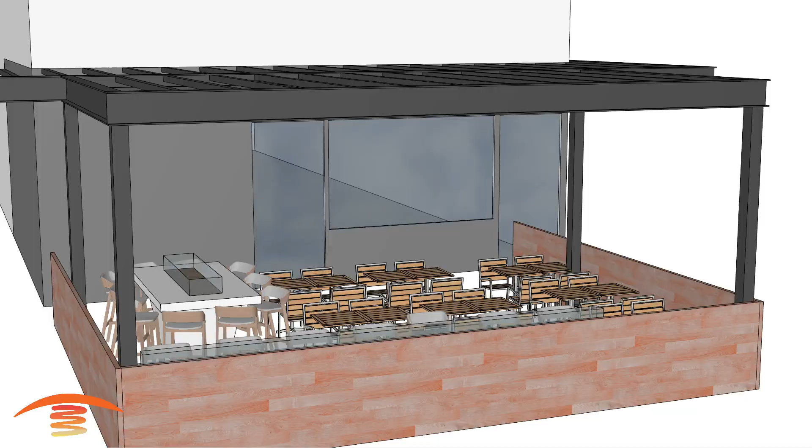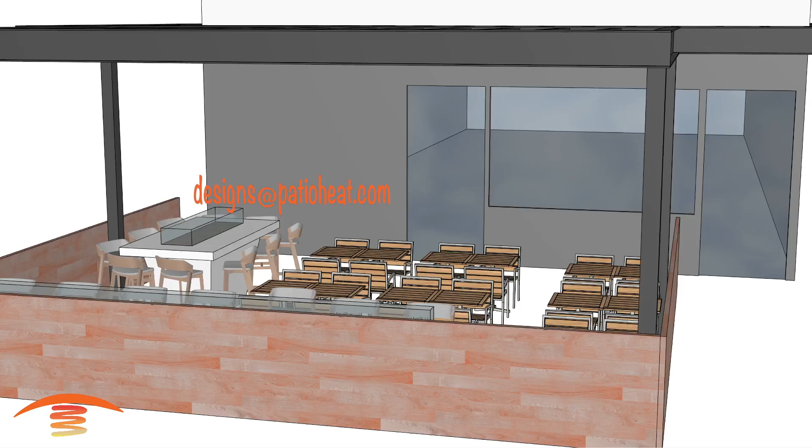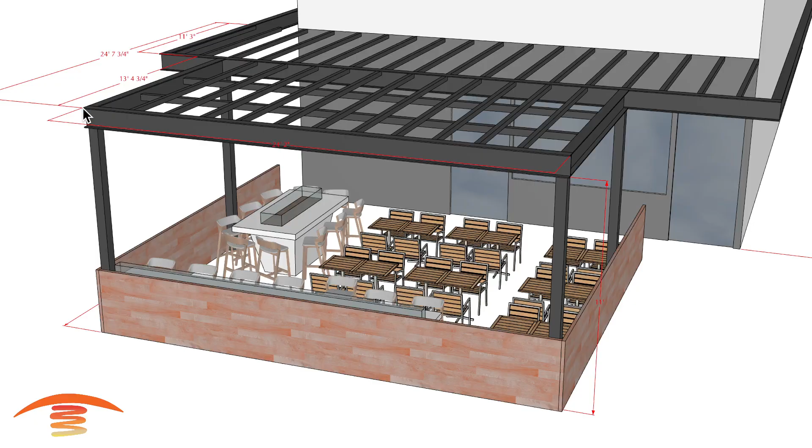So this is a commercial restaurant application, let's look at the overall dimensions I have here. Overall, I have about 24 feet from the outside edge to the outside edge, and a total basic seating position here at 20 foot 7 inches, maybe 20 foot 6. I got the floor plan for this application and marked up this particular space, and came up with about 24 foot and a quarter of a foot.

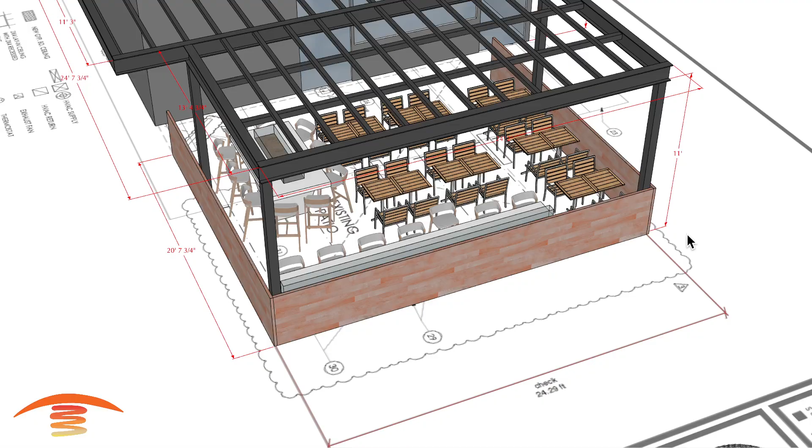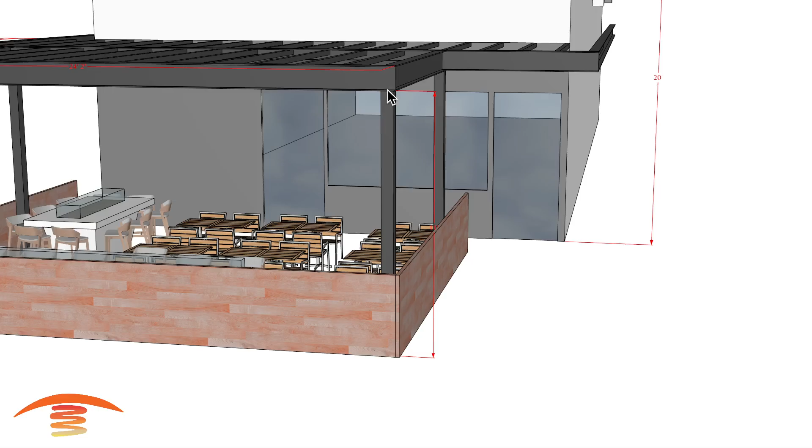Let's look at some of the other dimensions I have here. This overall section is 24 foot 7, and I also have a height of about 11 feet off the finished floor. Now this could be 12 foot. This section, the beam, is actually 12 inches, it could be lower, so I'm not 100% certain of that, but this is my best guesstimation.

We have bar stool seating over here, bar stool seating here, and then dining space over here. Let's turn off those dimensions and look at a couple of different options.

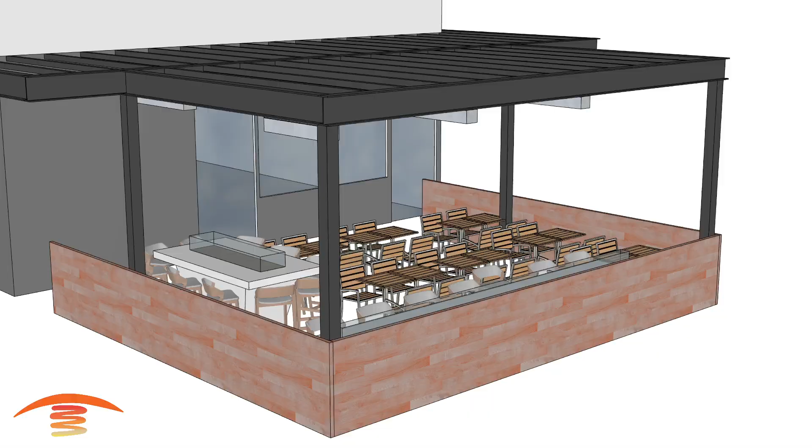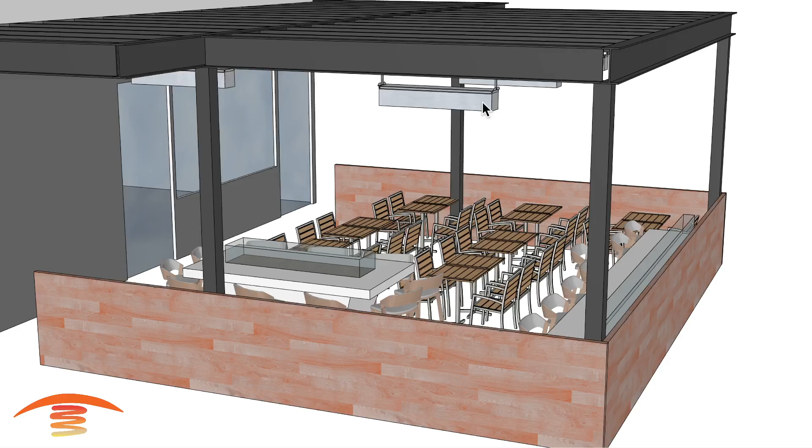The first option I like best would be utilizing the Sunpak TSH and S34 combination. So these two units here and this unit in front would be a TSH. That gives you the flexibility for bar stool seating height to turn the units high and low, in other words 34,000 BTU output or 25,000 BTU output, and based on the location, December is their coldest month of the year.

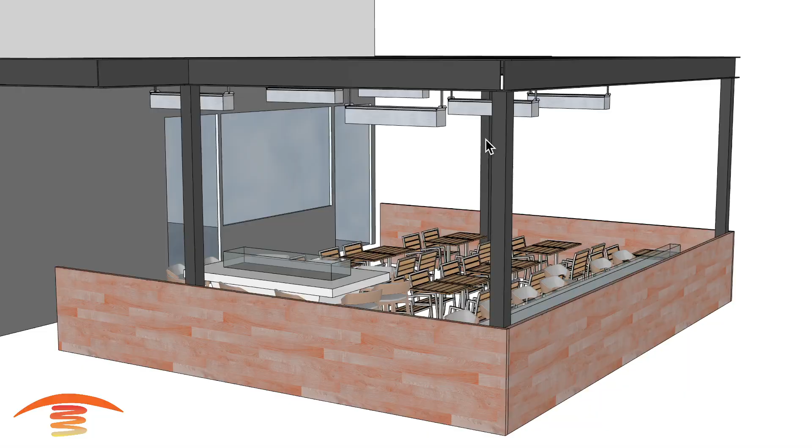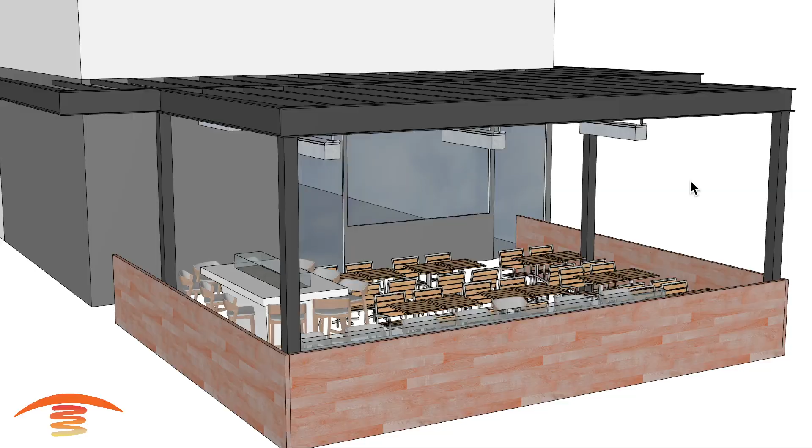I also looked at wind. The wind is pushing around 14 miles an hour at the windiest time of the year. These are gas burning units, so anything above 12 miles per hour on wind is something you want to be concerned about. You wouldn't want to leave the units on beyond that 12-mile maximum wind speed. In any case, the TSHs allow for that flexibility, especially for these positions for high-low.

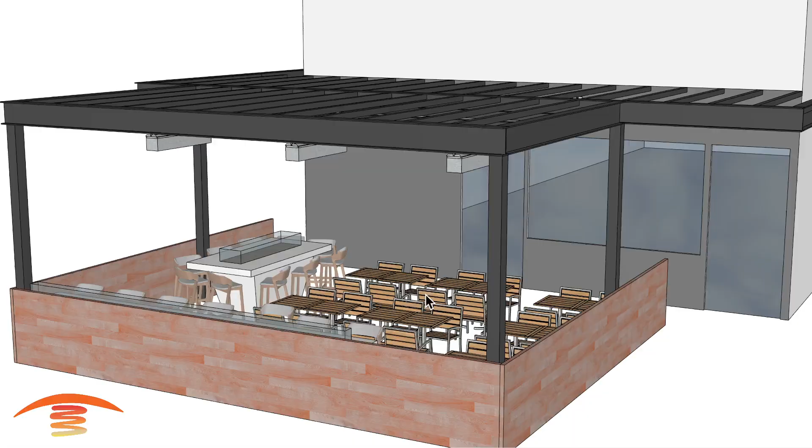Personally, I would probably go with TSHs on all the units, which gives you flexibility throughout the entire season, where maybe these particular customers would like just a low output at different times of the year, when it's in the 60s, 65 degrees, maybe they only want 25,000 BTUs. So that gives you a lot of flexibility using the TSHs.

Another thing is the maximum height I like of this particular unit is between that 8 and 10 foot max height, so this would be the bottom edge maximum of 10 foot off the finished floor, and I would prefer somewhere in that 8 to 9 if that's possible.

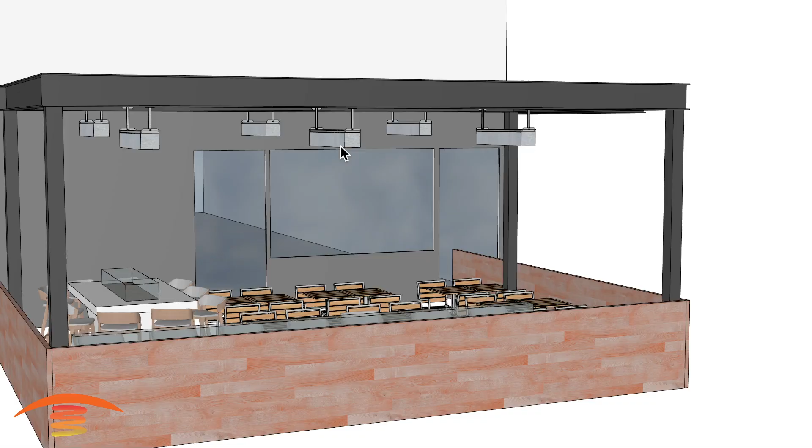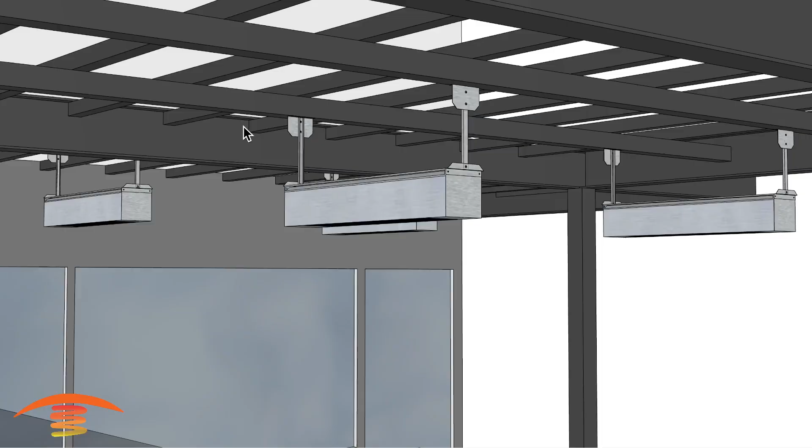When you mount the heaters, the bracket itself, or the bar here, comes in a 21-inch long bracket, so you can have them mounted on these cross members here, as well as these cross members over here. These are a little bit higher than these, so if you wanted to make sure they're the same height, maybe you can drop these down, but right now I have these at 17 inches drop down from the actual bar. The 17 inches is based on the fact that there's a clearance requirement.

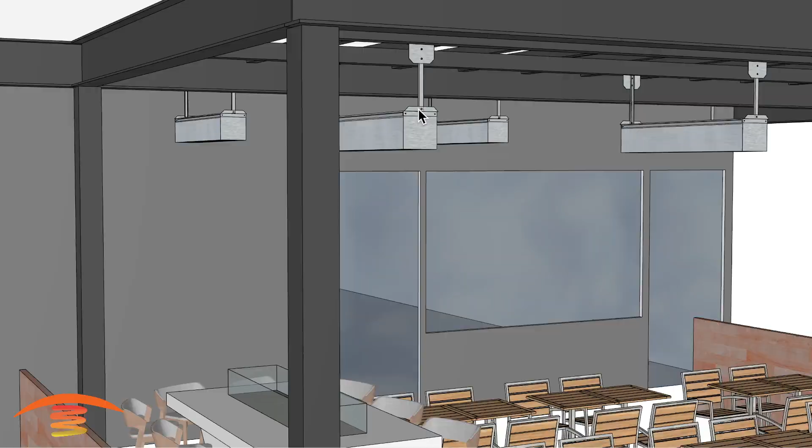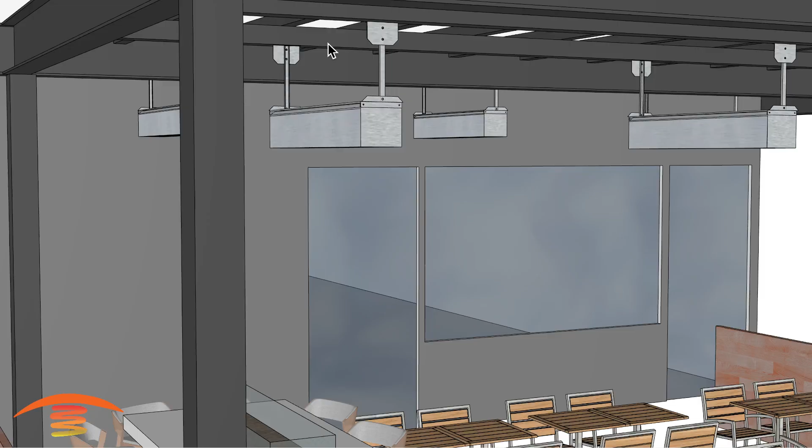Excuse me, that's 14 inches, a 14-inch clearance above the heater itself, and that's for combustible material. Now let's just say that this is all non-combustible, which I believe it might be, because it looks like it's all steel frame, but I'm not sure if there's any cover on top of it.

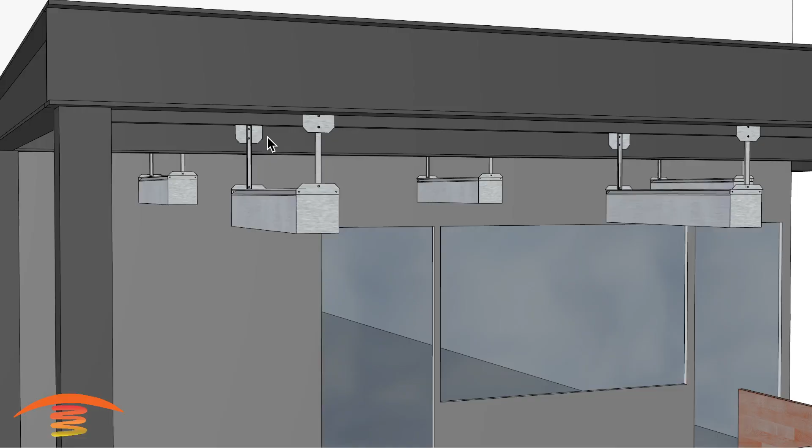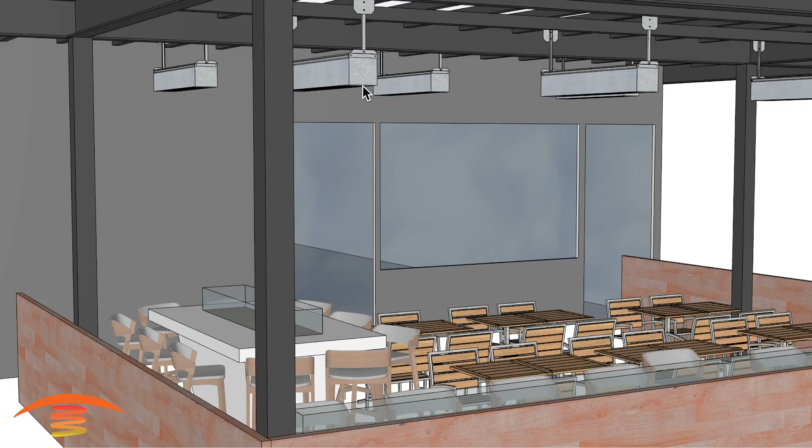So that's something else you have to be concerned about. You would have to keep that 14-inch clearance from any distance that's up here, let's say, so from here down to the top of the heater is that 14-inch minimum for any combustible material. However, if it's non-combustible, you can go a little bit higher, but again, putting the unit higher than that 10-foot mounting height at the bottom of the unit is something I'm concerned about. I would prefer it to be, like I said, between that 8 and 9 if possible, and 10 at the maximum for the bottom edge of the heater.

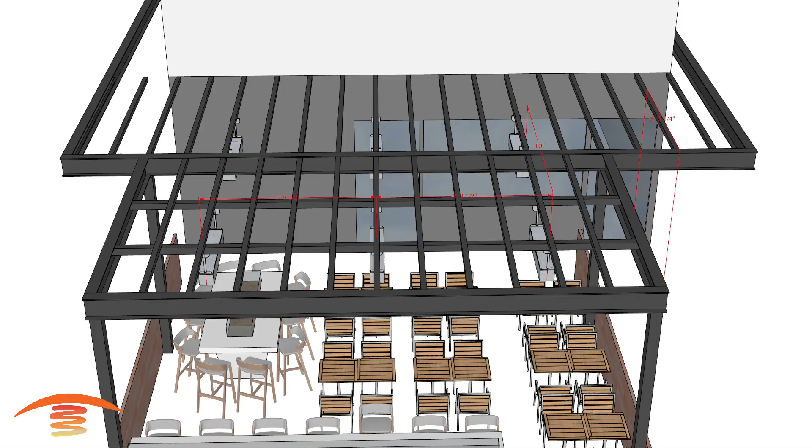In any case, I did place these heaters, trying to center point them based on where it looked like these cross members go. Let's look at those distances I have. Right now I have 7 foot 9 inches from center point to center point, and that would be true on this. I tried to base it on the center point of the patio itself from here to here, and I did have to move them based on where this actual cross member is.

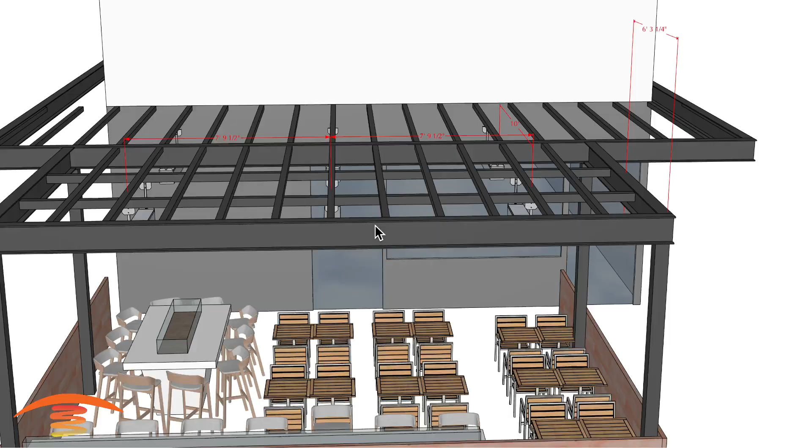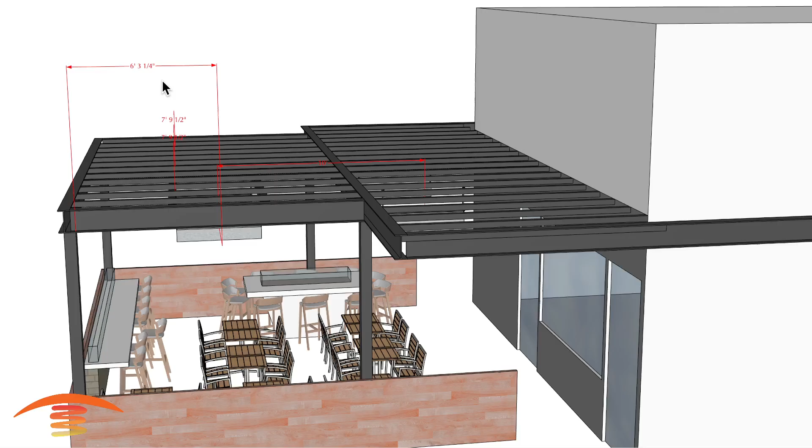So it's not exactly in the center, but that's the focus point of the positions of the units themselves. You can see the center point of the heater here to the center point of the heater here at 10 foot center to center. And I have the center point of these first ones from the inside edge of this post here at 6'3", and that should be all of what you're looking for.

Another thing to mention is the dimension of the heater itself. This particular part is 8 inches wide, 8 inches tall, and 48 inches long. So keep that in mind.

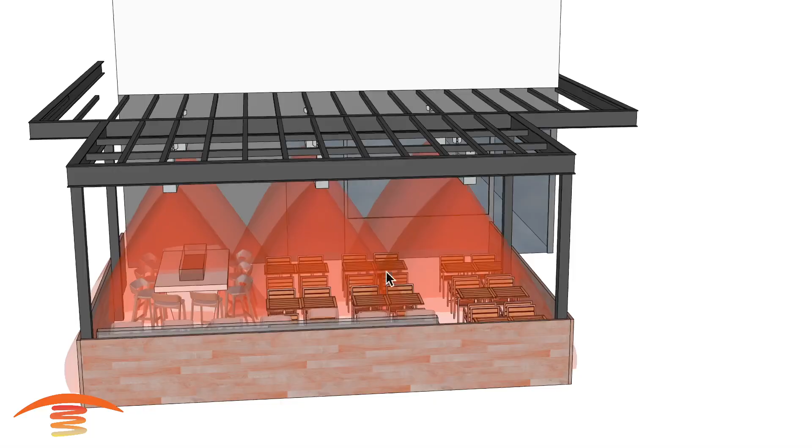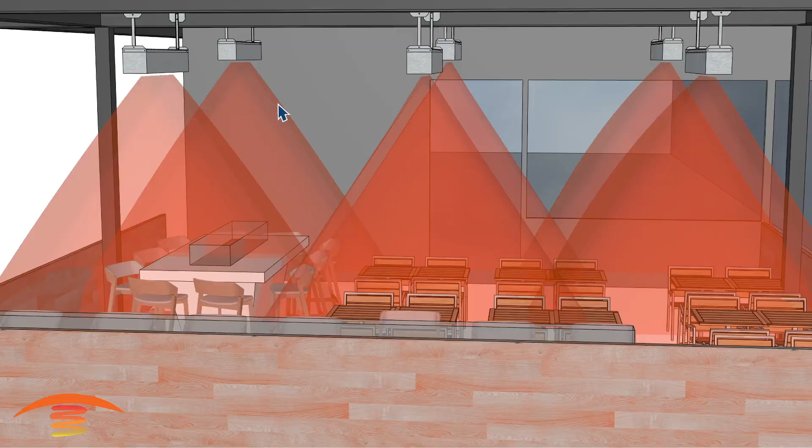Let's look at the footprint of heat. The footprint of heat is heating up this whole entire patio just perfectly. This is why I prefer this particular quantity, 6 of the units, and the positions that I like, because you're going to heat up all the space. There might be times where this particular customer doesn't want any heat, but other customers want more heat. So this allows you to be very flexible with this particular application.

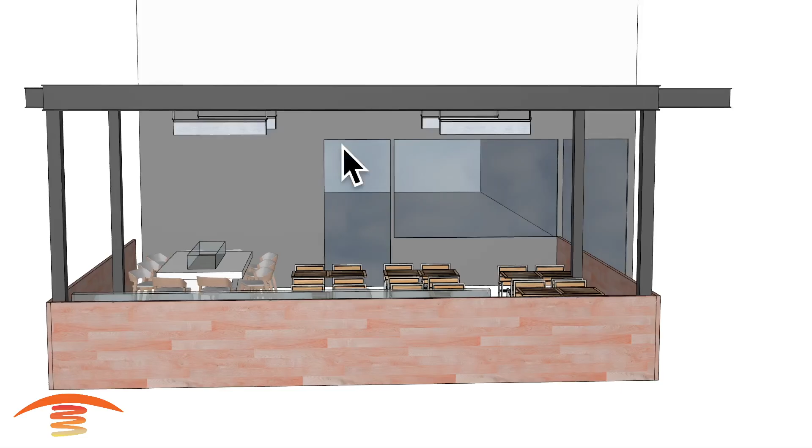So that is option 1, and let's go ahead and look at option 2. That would be possibly using 4 units. These are the same units, TSH, TSH, and TSH, and this one here, S34 or TSH as well.

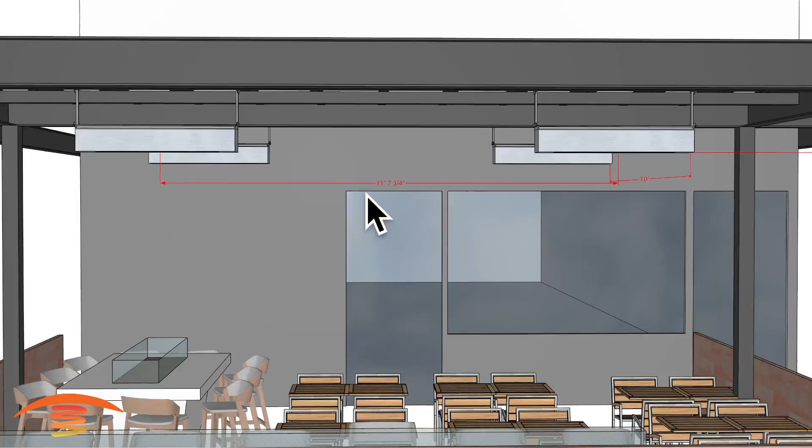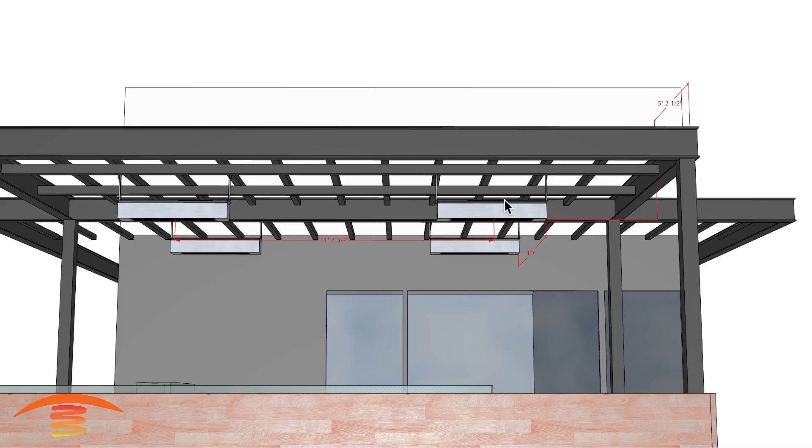Let's look at the distances on this particular application. You can see from center point to center point, I have them roughly about 11 feet 7 inches, and that's because of where these beams are located. Possibly if they're a little closer to each other, I would move them in more than out. I like these heaters to be around 11 max, and we are actually past that 11 max at 11'7" from what I'm showing.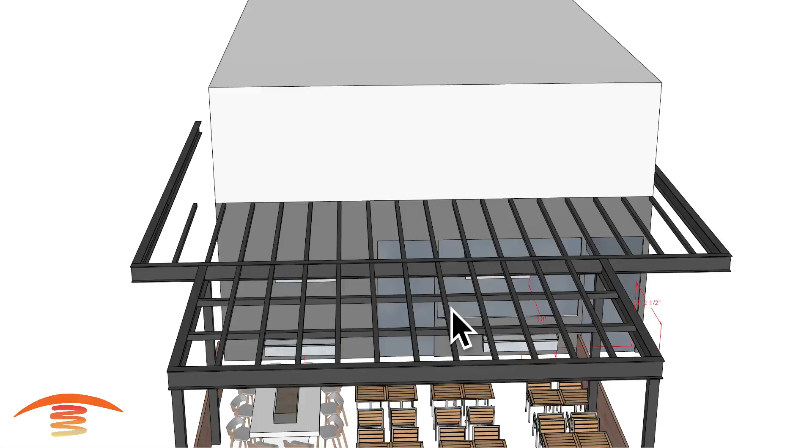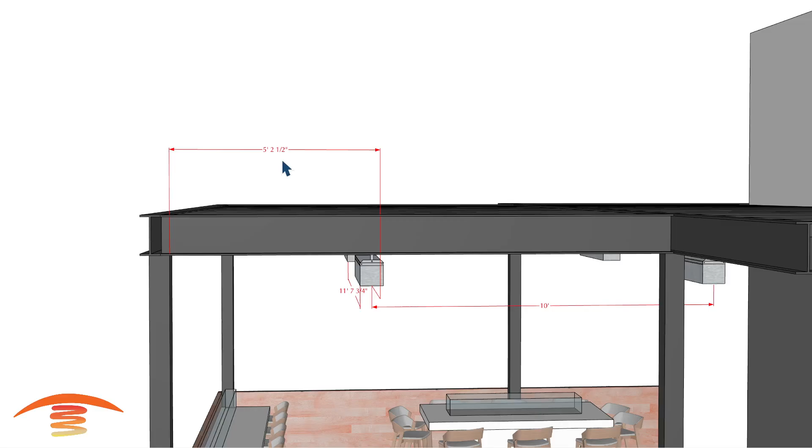These cross members here are a little further in than what I'm showing, because I don't have the actual structural integrity of the design here. So 11 feet max is my preferred, and 10 foot minimum is my other preferred. The other thing is we have the center point here at 5'2.5", and then the heaters are 10 foot center to center from here to here.

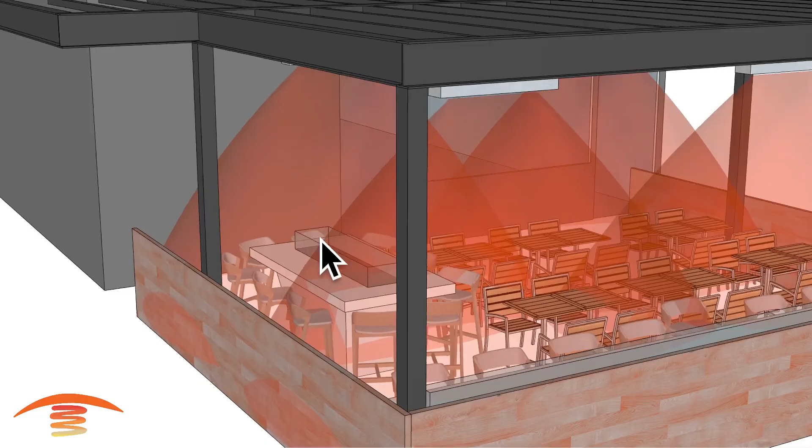Let's look at the footprint of heat. The footprint of heat is fairly decent. I would say the center point here isn't going to be the most comfortable, and when these customers ask for less heat, going 25,000 BTUs, this particular table isn't going to be heated as much. It might be fine for these guys at 25,000, but over here this would not be as perfect, and again this particular position here.

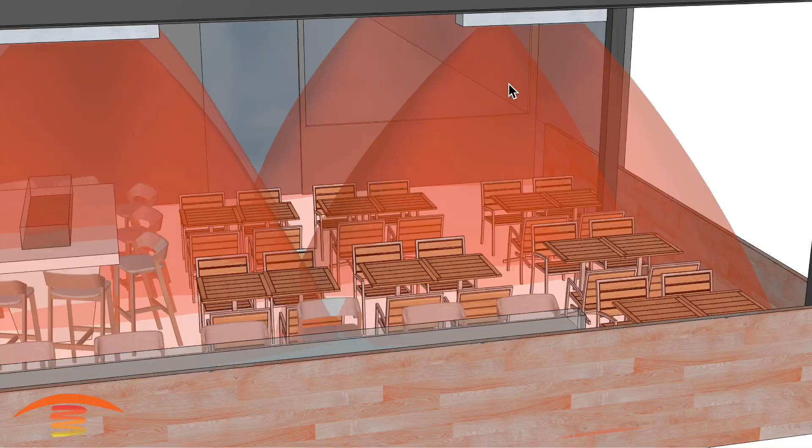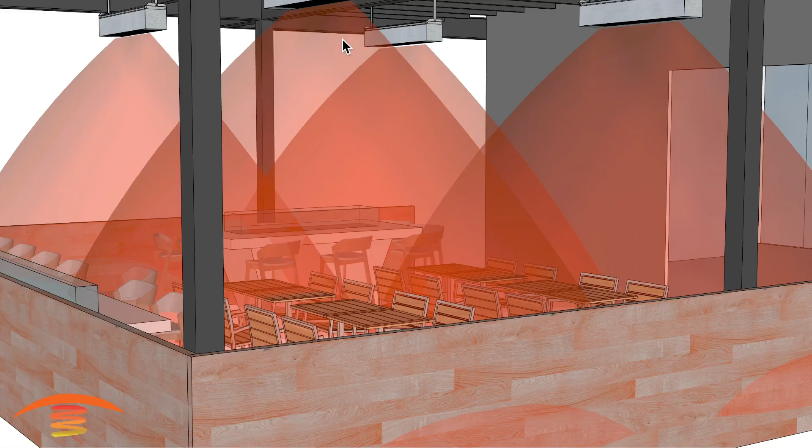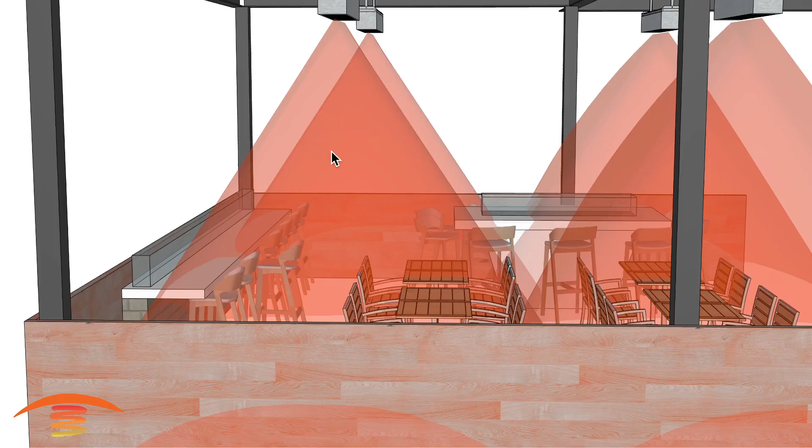So if you're sitting here and it's at 25,000 on a cool evening, not cold, but say 60 to 65 degrees, you might want 25,000 here, but you would definitely want 34,000 sitting lower. The way these heaters work is that for every foot away from the output of the heater, the intensity is divided by 4, so you're actually sitting about 1.5 feet less than a bar stool seating height, so the intensity will be less here either way, 25 or 34. At 34, this might be too hot when it's 65 degrees, but at 25,000 BTUs, this might be too cold. So it's something you'd really want to consider.

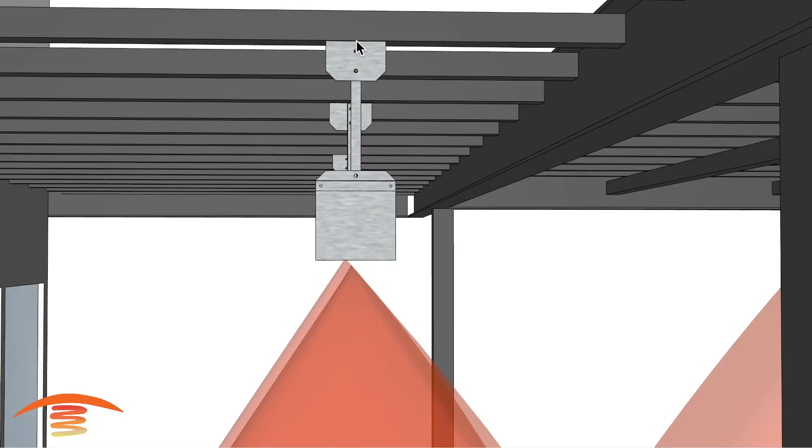But yeah, this would work, though it's not my preferred. Is there anything else I should mention. Again, the height, I have these mounted on the cross members at 28.25 inches from outside edge to outside edge, and that's why I have them positioned exactly where I have them, if we could. These positions are a little different than what I'm showing, or the location of each beam is different from what I'm showing.

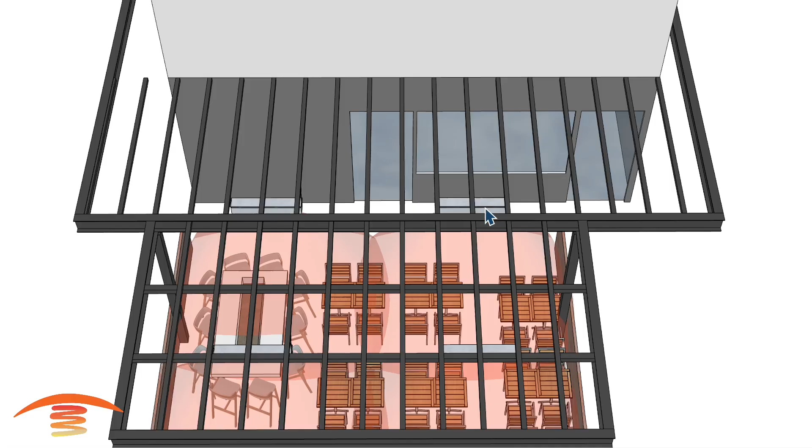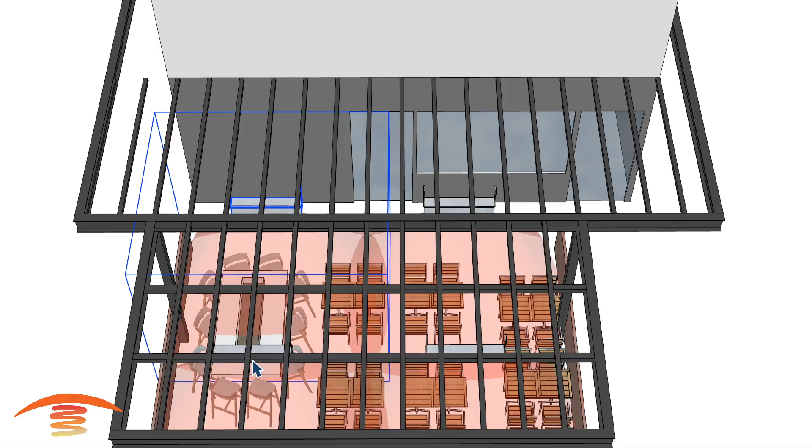Could we move these in slightly? That would be really nice if we can move, let's say maybe 6.5 inches, or more like 8 inches in. Let's try 8 inches correctly, and then move these 8 inches in this way. If this is possible, that would be great.

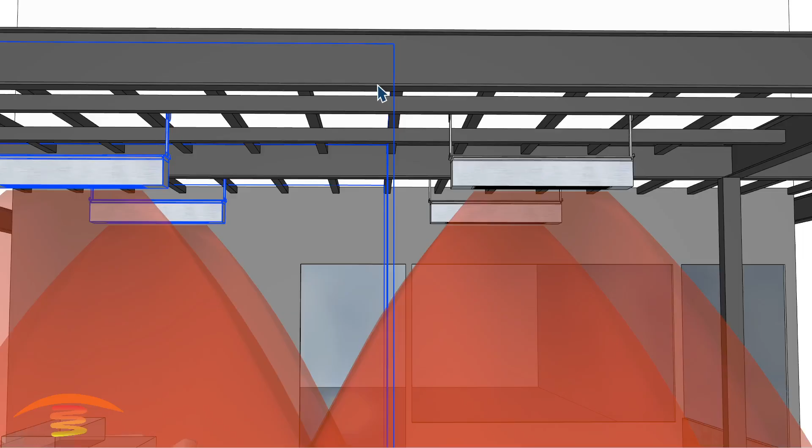Because you're getting that overlapping rays over here, but then we're starting to look at the outer edge seating positions not being covered as well. And I'm not sure of the exact location of these cross members, so that may or may not work for the back area over here. But let's go ahead and place them back where I had them, and yeah, that would be okay, and this would be excellent.

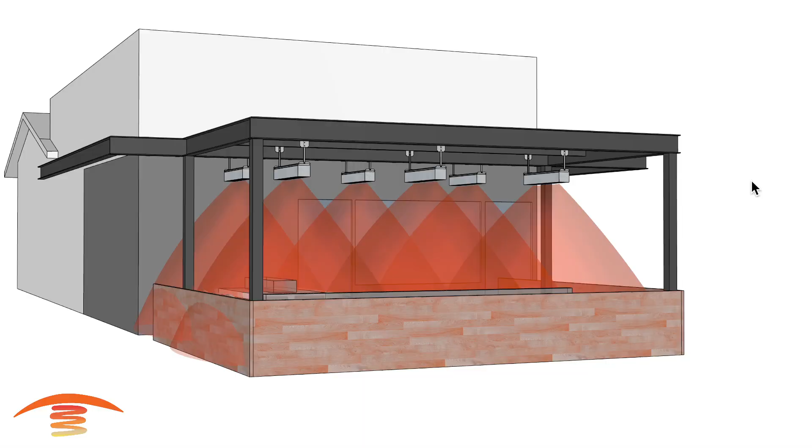All right, well, I hope this has helped. If you're looking for some assistance with your outdoor heating application and would like us to review your plans, send your information in.